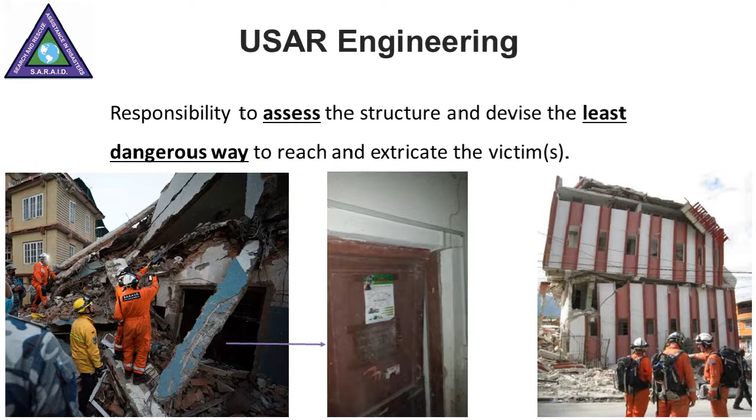And that door is obviously below the collapsed floors and slabs above. So there's a good chance that that door is actually supporting some of the weight of the structure above, and that the door may be acting structurally. So that would mean that if it was necessary to go further into the structure, then the least dangerous way probably doesn't involve kicking that door down, or at least it would involve attempting to stabilize the structure before proceeding.

To give further examples from the Nepal earthquake. The Nepal earthquake occurred in 2015. It was a magnitude 7.8. The original shock was to the northwest of the capital city of Kathmandu. It resulted in over 8,500 casualties. Teams from around the world responded, all the way from the UK, many countries across the EU, India, China, the US, and many more. And SARAID was among those teams, and we deployed to Nepal, and we conducted search and rescue for 4 days alongside a German light team called At Fire.

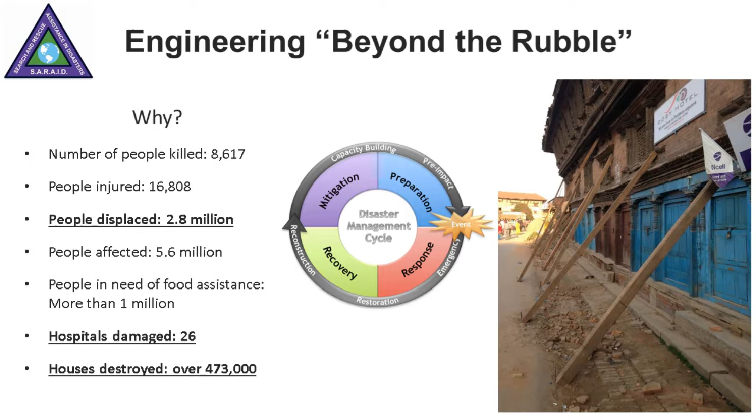One such response that can be done in the so-called beyond the rubble phase, so after the search and rescue, or one response that can be done by engineers, and it's one of several, is damage assessments.

And in Nepal, there was a request from the government, which filtered down to the Nepal Engineering College, which filtered down to the USAR coordination cell, which coordinates the search and rescue teams in country. And that request was for engineers to assist with damage assessment. And so SARAID were among a number of teams, including THW from Germany, MSB from Sweden, guys from the UAE, a number of teams who actually committed engineers to that request to assist with damage assessment.

Alongside those teams, you also had something called the EU Civil Protection Mechanism, which also had engineers on their team who also committed those people to assist with these damage assessments. Now, my impression of the damage assessments here was that there was a huge need for damage assessment, a huge number of damaged buildings that people were still inhabiting or wanted to know if they could inhabit. But the coordination and the response to that damage assessment need was perhaps a little bit limited.

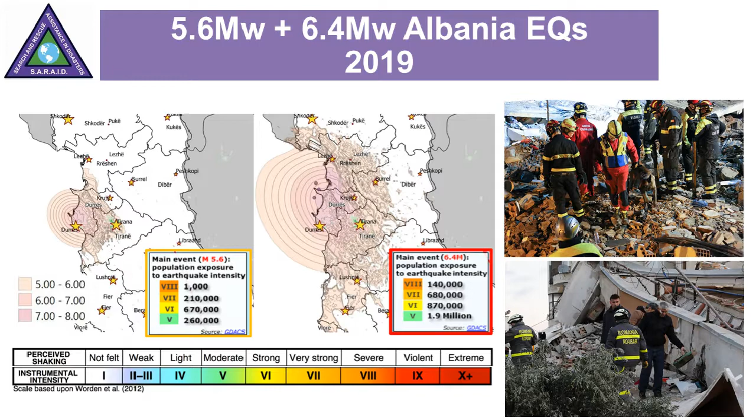But my focus was on the damage assessments. And what came to the fore was that, again, there were a number of very familiar lessons. So in September, the first event in Albania, we were lucky to have a little bit more time to be able to observe what was being done and make recommendations.

And what we saw was there were different procedures for assessment in different locations. So different engineers were conducting their assessments in different ways and were recording data in different ways. The procedures that were in place, or rather the forms that were handed to the different engineers, did not have methods or instructions, which meant that it was up to the engineer to interpret what they felt was light, moderate, and heavy damage. So again, different engineers looking at the same building could easily come to different conclusions on this.

And the result of that is that it's difficult to achieve consistent decision making, which is important when you're talking about life safety and telling people if they need to leave their homes. It's difficult to identify priorities and budget at a national level when the data can't be aggregated because it's all on a different basis. And the request for international assistance is very much hampered when the underlying data that forms the basis of that request is flawed.

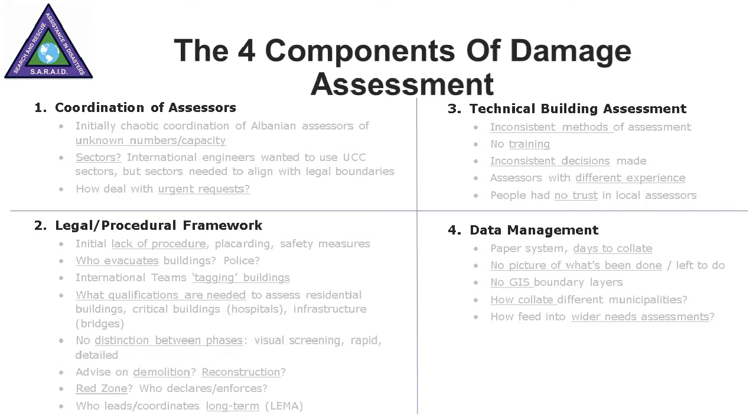And that is that the lessons were the same, that all of these components had to be in place, and that was the efficient coordination of assessors, an effective legal and procedural framework to conduct those assessments, a consistent and well-documented method for technical building assessment, and the efficient management and collection and analysis of the data.

And so the EU's response, our response to the November event, was to set up what we then called the Damage Assessment Coordination Centre, or the DAC, and you'll see that acronym throughout the presentation now. And the DAC is an international body, it's an international structure that sits alongside the host nation structure of damage assessment coordination. And the DAC's objectives are twofold, and that is primarily to support the host nation, to support the government of Albania to set up and maintain their own system of damage assessment coordination, incorporating those 4 key components on the previous slide.

And the second objective is to coordinate the international engineers and efforts that are in country, again, capturing the knowledge of those initially USAR teams that were in country doing the rescues. And then when it was apparent that this system was very effective, there was a further request for engineers, and we ended up having 185 engineers from 18 different countries that were coordinated to work alongside the Albanian assessors, and the overall assessment achieved nearly 40,000 assessments, which impacts every one of those 17,000 people that were displaced in this event.

So that's where I'll leave it and hand it over to Mark to talk about what his experience was actually on the ground conducting these assessments in Albania.

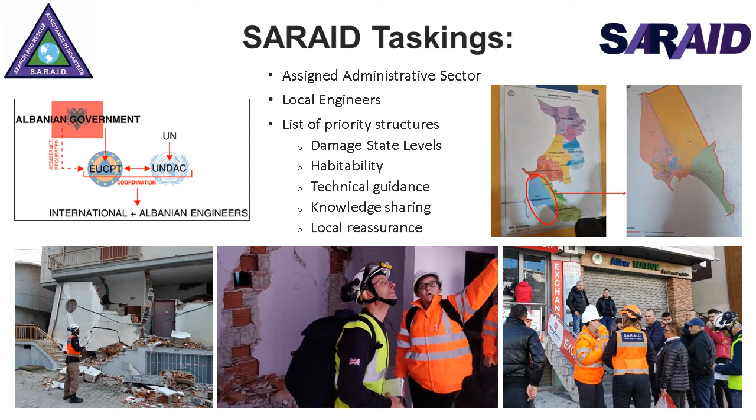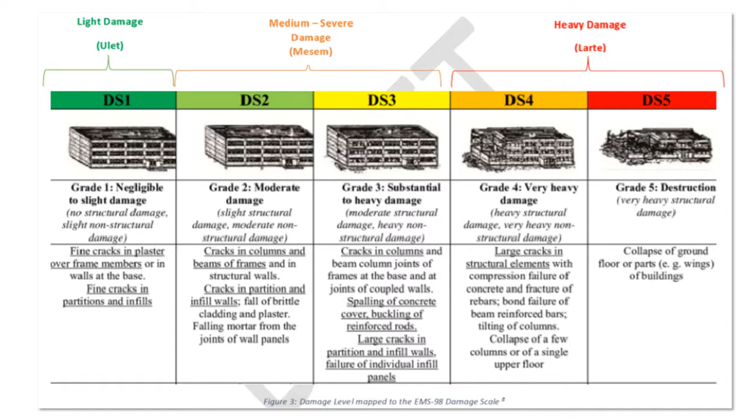This was still in the phase of relatively rapid assessments being done by the international community, assisting the local engineers. But this would highlight any structures that needed subsequent, more detailed structural assessments that could be done at a later date.

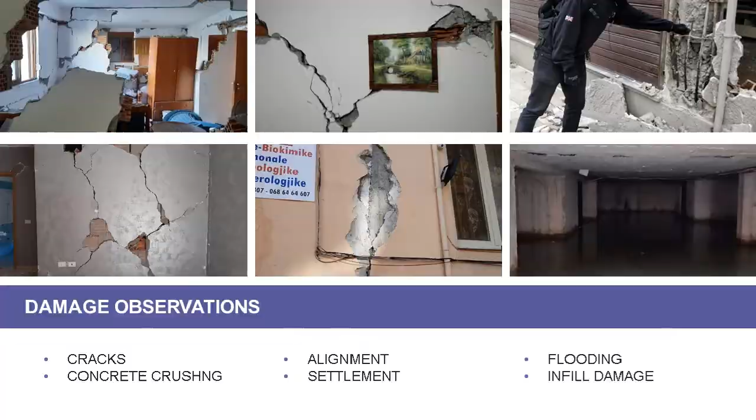We were given our taskings by email every day very efficiently, and we submitted our results at the end of each day back in with our damage state levels in parallel with the local assessors who had the forms, and they would sign off on these forms and then submit them back in, and they would be digitized and they would go into the main database to be used for the remediation and the rebuilding effort in the future.

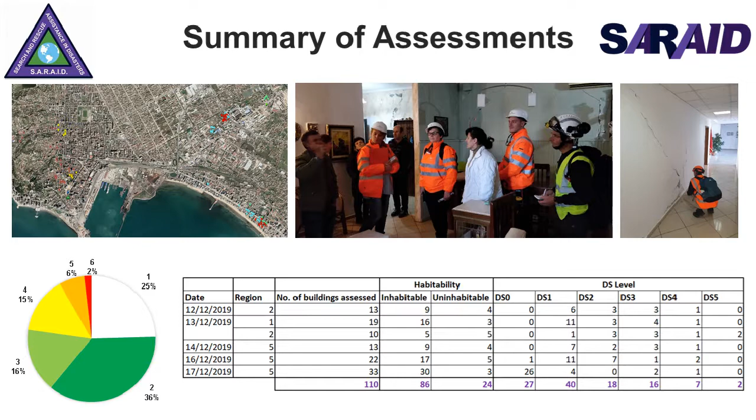However, there were issues. The majority of the collapses were due to lack of control and regulations, poor quality construction. These are the same things we often see in every disaster, particularly with infill walls and connections there, which provide a life safety hazard falling on people below.

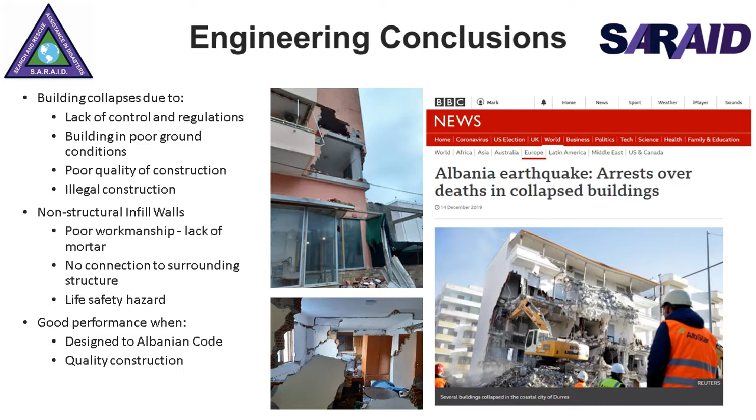And he told us this story there on site and was fairly emotional about it, but it was a miraculous account; any wrong position, and that could have been the end for him. But there's always hope, which is why SARAID as an organisation still deploys and still places a massive amount of importance on doing everything we can to help those in need.

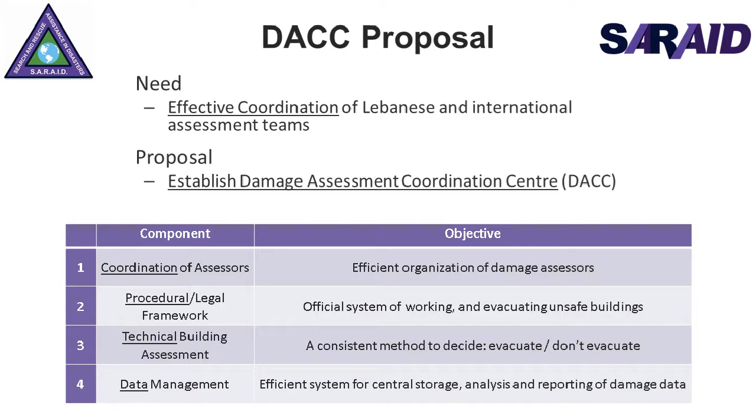The procedural and legal framework, which I'm going to touch on next, is important to ensure that there is an official system of working and who does what in this situation. In terms of who has the responsibility and the power to do such, in terms of designating buildings as being unsafe or restricted for use, this has to come from those in country as the local government or the local authority in charge of the situation. This is not the responsibility or the place for the international teams to impose that on the system, and so it has to be understood.

A lot of the time there's a good assessment procedure in place by the host nation, as was the case in Beirut, and sometimes for consistency, just a few recommendations or advice from the international experience can be all that's required to supplement it. We're not there to take over, we are there simply to support and help the host nation establish a good procedure within a legal framework that buildings can be assessed.

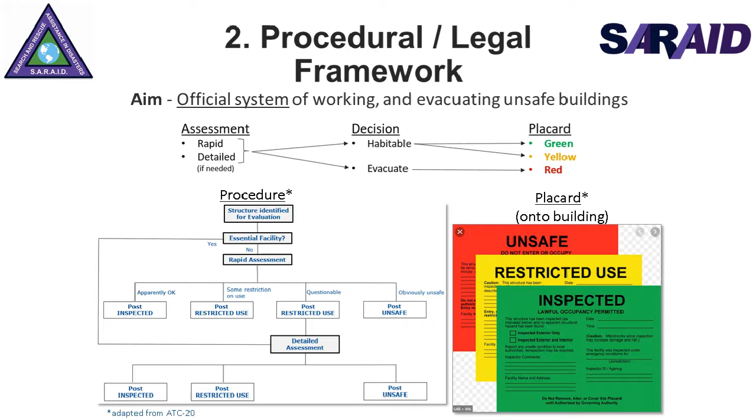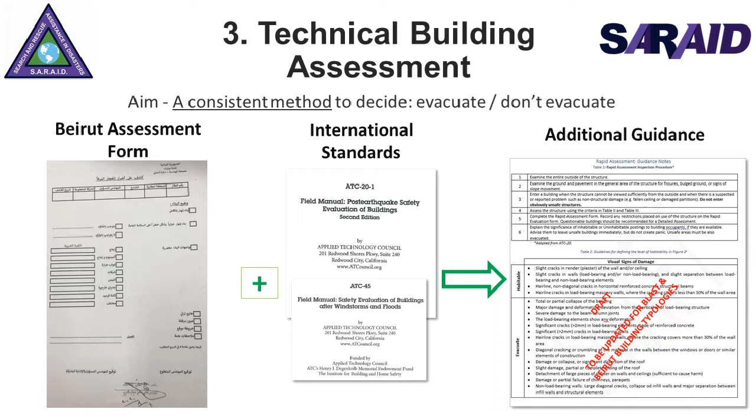Suzie again is going to talk about some of the particular cases of how it was implemented on the ground and hopefully the success of it, and now I'll hand over to her, who can talk in a bit more detail about the boots on the ground in Beirut.

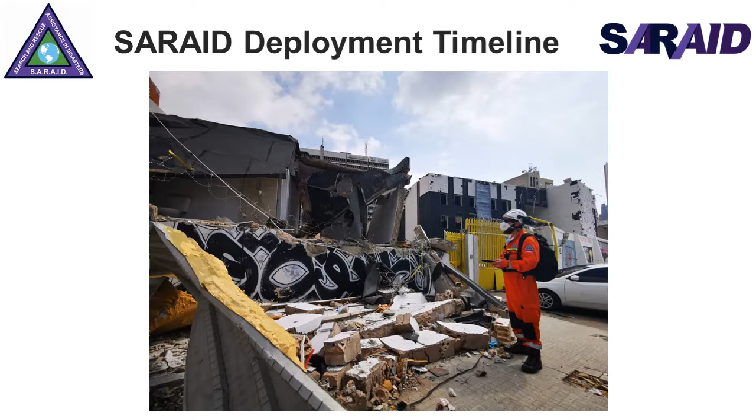So as Mark and Josh have mentioned, a large part of what we did out there was coordination of international assessors. We have all these skilled engineers from search and rescue teams, and we need to make sure that they are utilised in an effective way and help the local engineers that are there. So this involves a few steps.

First of all, sectorisation of the city. This is essentially where we divide the city up into portions, and it means that we can send teams out to these portions, and separate teams don't overlap with each other as they have outlines of the areas they're looking at. So it really just helps with logistics.

As Mark mentioned, this is all based on administrative boundaries within the city, but often those are too big, so you do want to subdivide those down so they become more manageable for a team to tackle. And this is a process very much done with the Lebanese authorities, as they're the ones with the knowledge of their own city, so it's important that it works for them.

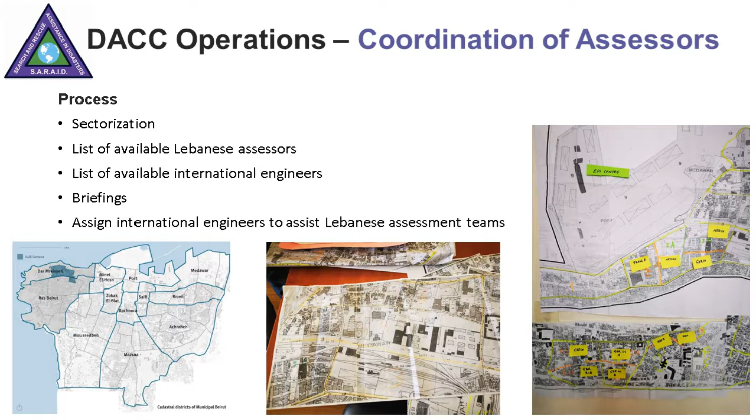These international engineers do have other commitments, as they've come with a USAR team. And also these USAR teams, over the days that we were there, were generally demobilising due to the primary function of USAR being over. So we just had to adapt to what resource we had each day.

And briefings were vitally important. So we held briefings with international engineers pretty much on a daily basis. As we were updating procedure, we had to brief the international teams of this and any changes to the forms or protocols that were now in place. The Lebanese engineers were also getting briefed on this, but that came through their own authorities.

And then lastly, assigning international engineers to assist the Lebanese engineers, which was quite a big logistical task for us. We did try to match the same teams up with the same local assessors each day, as naturally you build up a rapport with people through working together. But it was also important to make sure that as sectors were getting complete, we were moving the resource to where it's needed. So this was also kind of an ever-changing picture.

The next, obviously, large thing that we did was technical building assessments. So Mark has already talked about how we developed the Lebanese assessment form. And then as part of that, SARAID engineers, including myself, went out with local engineers each day. And this was really key for us to understand the assessment procedure that was already in place and to be able to comment on what could possibly be tweaked or improved upon.

I just want to run through some examples that we came across to give you an idea of the sorts of buildings we were looking at and the process that's involved. So the aim of the inspections is essentially to determine if the building is habitable or needs to be evacuated. At this level of assessment, we're not trying to work out the exact faults of the building or how they could be rectified. This in-depth level of assessment happens at a later date.

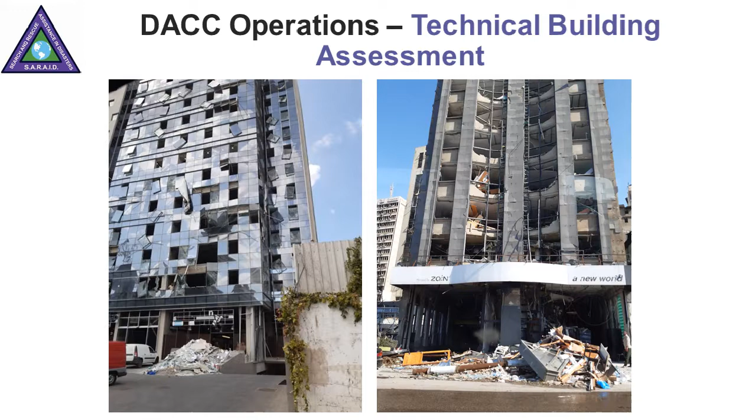Another example we came across, we actually got sent to this building as part of our rapid response team. In the left picture, towards the top, just below the glass, you can see that part of the parapet has been blown out, and then the other two sections look as if they're about to fall out. The right picture is just a picture from the inside.

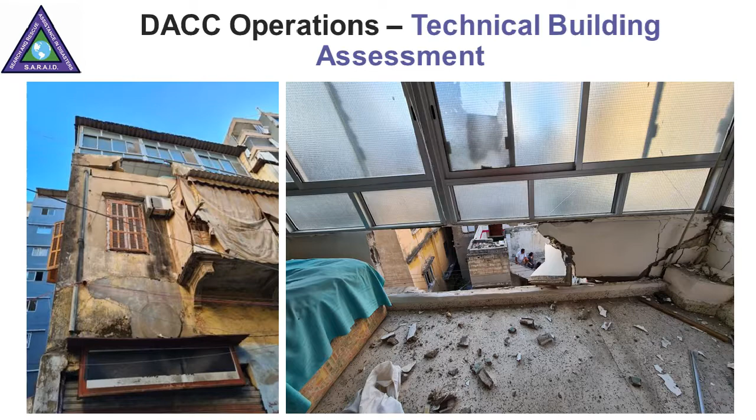So for us, there's a few concerns here. Obviously, if that parapet fails, it appears to be supporting the facade above, which in turn is supporting the roof. So if that parapet fails, you've got a risk of the roof falling into the room below, but you've also got a risk to the streets around this building. So it ended up that the streets were all cordoned off and evacuated, and the building was as well.

So data management has been touched on. The Lebanese took control of their own data management, which is really important, and it needs to be this way, as when we leave, they need to still have an understanding of the data that they have back from their assessors. So from a DACC point of view, the data we were managing was coming in from the international engineers. We collated information that came in each day, recorded it, and it allowed us to start building up a picture of what's going on on the ground.

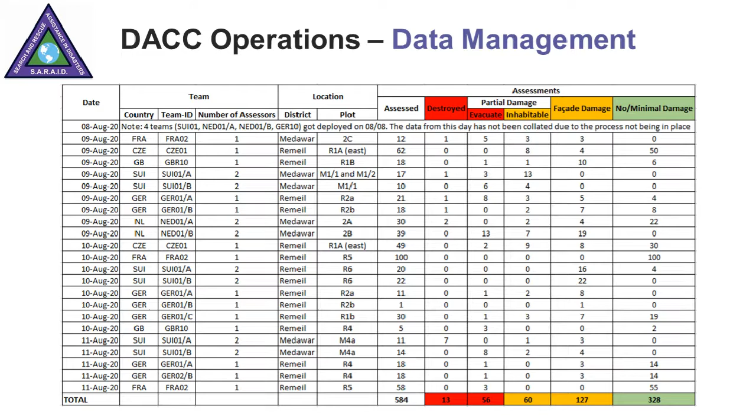So as this data came in, these are the sorts of graphs that we were able to produce. The one on the left, as you can see, as the days go on, the amount of red and yellow buildings that we were coming across was decreasing. And this is quite typical for this situation, as you are typically going to the worst case areas first to do those assessments and moving out to buildings that were less affected. And then on the right, you can see the sectors beginning with M, which was Medawar, which is right next to the blast, have a much higher proportion of red and yellow buildings. And again, of course, it's right next to the blast compared to the sectors further out.

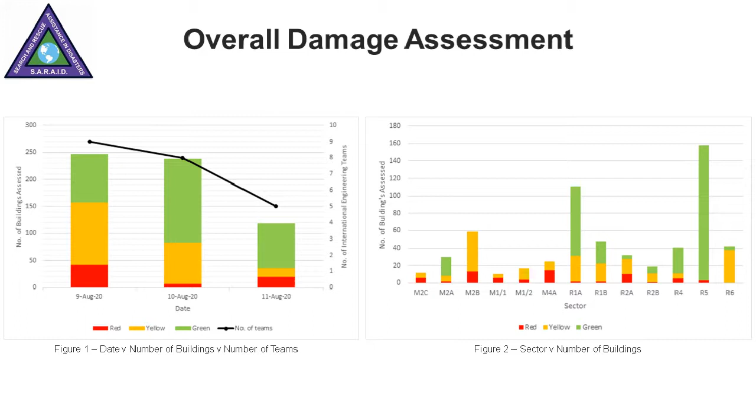So unfortunately, we did have to leave and head back. So we did quite an extensive handover procedure with the Lebanese authorities, and this came in a number of formats. So obviously over the days that we were there, we were agreeing content for a guidance note, which we put together for them. So that's the proposal for Lebanese-led damage assessment coordination in Beirut. This just compiled everything that we'd discussed with them and agreed with them over the past few days.

So changes to the form and the kind of placards that we suggested to them. We also did some capacity building workshops to the municipality assessors on this assessment procedure that we'd agreed. We did a sectorization workshop with the military as a bit of capacity building there. And then lastly, we had a rota deployment report, which included data from the international engineers. And this went out to international organisations such as the British Embassy and SARAID, UN.

So we were compiling all of this whilst in Lebanon, as we wanted to make sure that on the day that we left, everything was in place and we'd handed over and we'd given them this guidance note before we're actually on a flight. So I guess what's the future? Well, in Beirut, they are continuing with assessments. This is a long procedure. After the quick assessments are done, you go into more detailed assessments, so they can figure out exactly which buildings are unfixable and which ones need some remedial work.

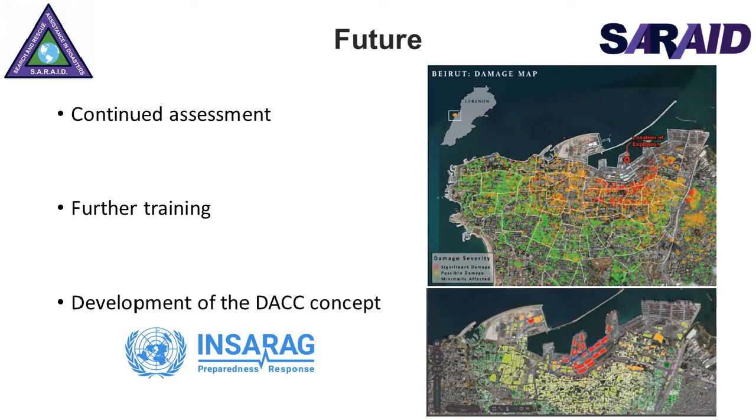And then our team leader today is actually at the Beirut After Action Review, which is a 2-day virtual workshop held by the UN out of Geneva. And it's all about giving feedback on the disaster response. And part of this is giving feedback on the DACC and to help start developing it as a concept. So yes, that's all from me. I guess any questions?

I'm not actually sure how people can raise them. So we've got 3 questions. Nikos, can you hear me? Or if not, it's no problem. I can read the questions, Josh, and then we can work out who wants to respond to them. The first one is, how much does a deployment cost SARAID, and who pays for this? Sure. So should we do one question at a time, or what were the other questions? I can. Let's go through one at a time.

Okay. Well, on the deployment costs, for Beirut, I couldn't say, and I don't know if Mark and Suzie know the number for Beirut, but for full USAR deployments... For Beirut, it was about 10 grand. Okay, yeah, so 10 grand, but that would be generally quite a bit less than a full USAR deployment, because a full USAR deployment would involve carrying a lot more equipment, a ton and a half of equipment on commercial flights. So I think for Nepal we were north of 20k. That could be more than that.

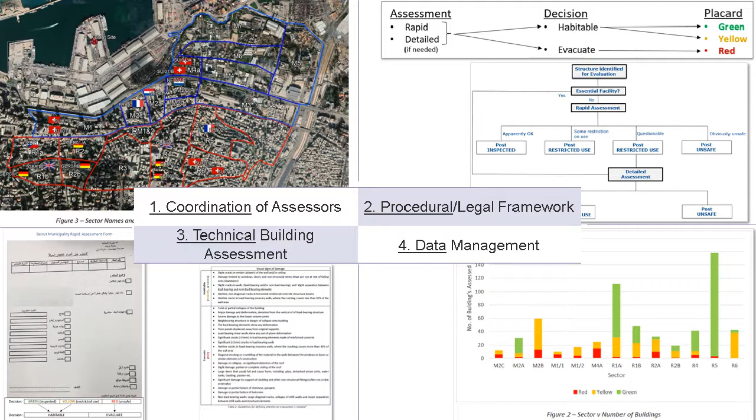And in this case, for the recent earthquake on Friday in the Aegean Sea affecting Izmir and other towns in Turkey and the island of Samos in Greece, it's not feasible for the team to actually go in person because of lockdown, because of travel restrictions.

So we'll be using various remote tools, including collection of data via social media, collection of data via other resources, and local partners that are carrying out local damage assessments we'll be working closely with. We'll be collecting data, drone footage, etc., where it's available, and these kinds of tools.

So it's separate to what SARAID is doing, but obviously it's very intertwined, and it's a good example of the different ways that engineers can get involved in the immediate response through SARAID, and in other ways as well. And we'd always encourage you to build those skills however you can, and hopefully come and speak to SARAID and EEFIT when you feel that you're able to contribute.

Perfect. Thanks, Josh. And I think that's all the questions. So over to you, Valentina and Nikos, just to close. Nikos, will you take over on the London Young Members Group, or I think I should be taking the lead? Can you see the slides? Yes, we can see the slides.